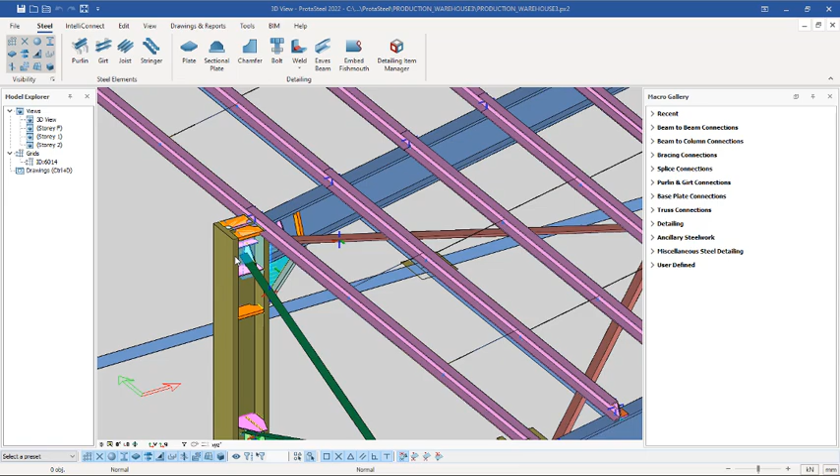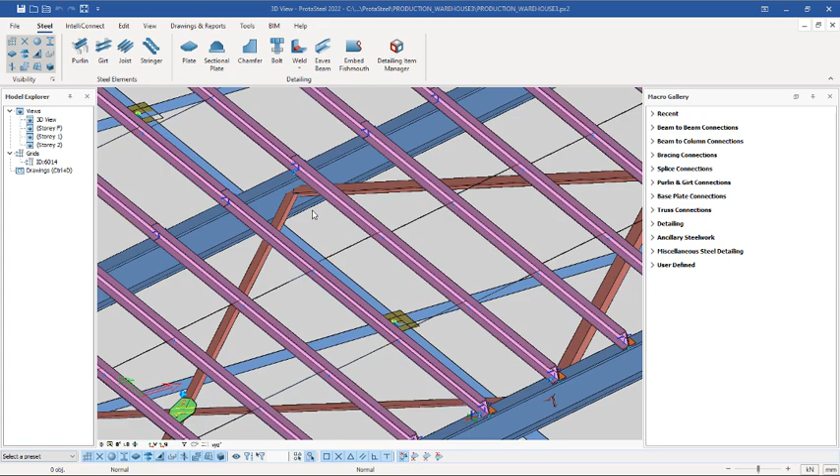To run our connections, for instance these two roof brace angle irons meeting right there, if you want to connect them together with the beam rafter, you go to where we have the brace connections in the macros gallery and expand these brace connections. We want to use a bolted gusset plate. Select the option by left clicking on it, then the first member you select should be the beam, which is the primary member, then select the two angle irons, right click, and you see that the brace has been fixed successfully and is being connected just like this.

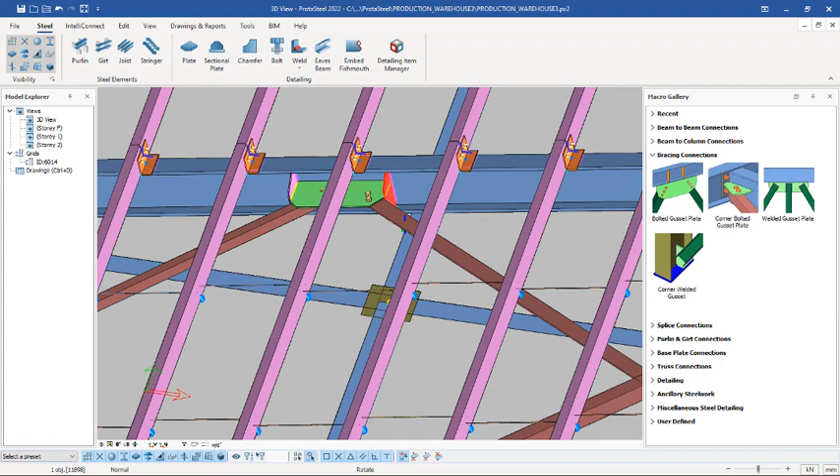If you don't really want this stiffener, you can select it just as it is and delete it.

The same thing is applicable here at this point of intersection of these two braces. You can as well run a connection here. You just click on this bolted gusset plate connection, select the main member and these two other members, right click, and it will be connected just like this.

If you check very well, you will notice that this connection is not modeled at all. So what you do, zoom closely to the macro, which is this one, and double click on the macro. Once you double click on it, it's going to bring up a dialog.

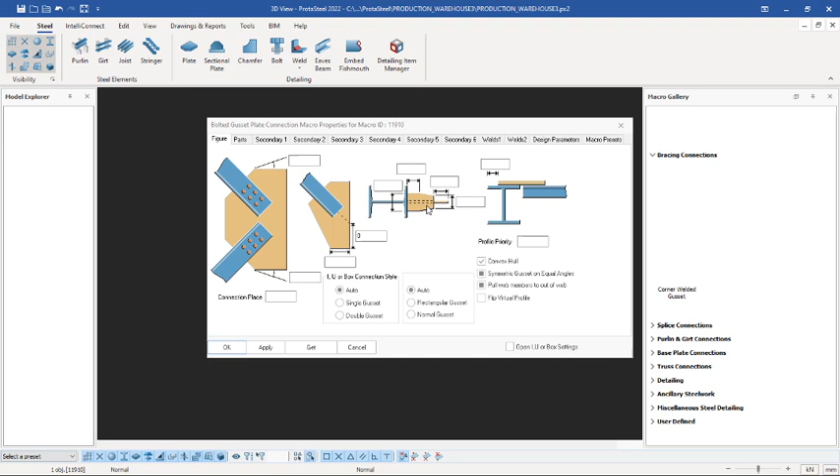In this dialog, what you have to do is in these provisions, key in 100 right there, after which you click on apply, so you can see how it's been shaped now and trimmed successfully. Click on the OK option. Now if you look at it, it is more modeled compared to the previous connection.

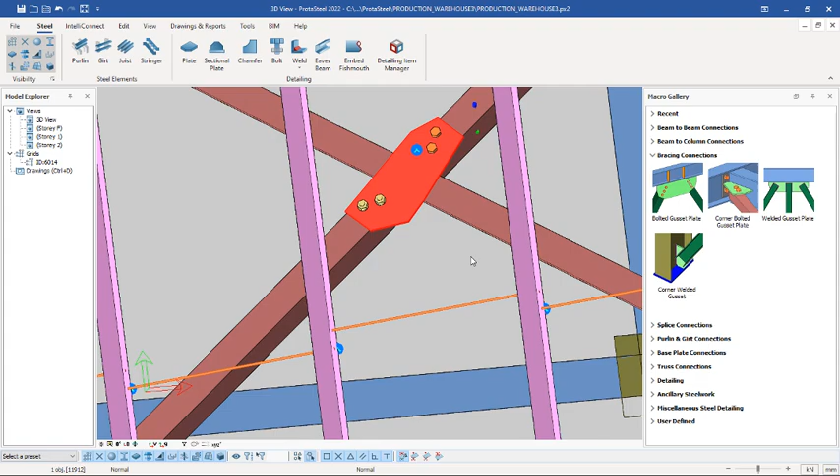This is how you carry out your roof braces. I just wanted to show us that successfully. The next thing we'll be looking at, I want to navigate us through the Model Explorer. Mind you, the same method is applicable to all of these vertical braces.

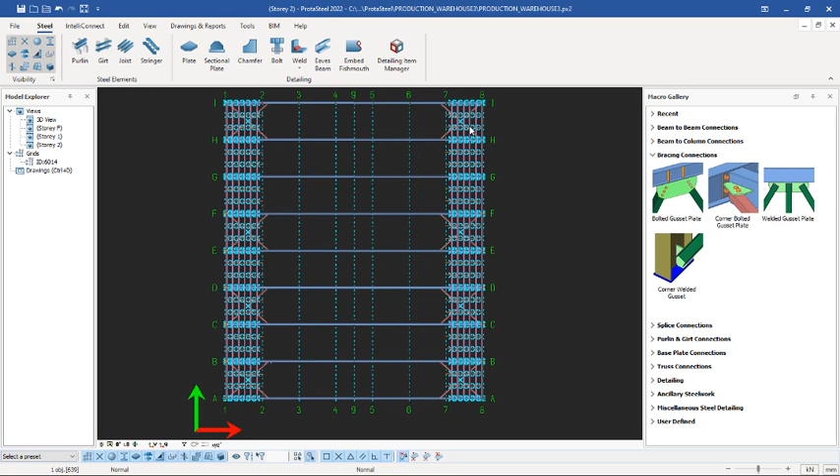If you come over to story 2 right here, you can see it has to do with the roof general arrangement. But if you look very well, you notice that not all the roof members are actually showing because of the reference level of the environment. So we are going to be setting the reference level of this environment so that we can see all of these roof members, so the whole area of the roof will be showing. So how do we do that?

Double click on the blank space to have this view property dialog just like this. After which, where you see up minus, up plus and down minus, you change that value to 0 right there. So we have made it unlimited by changing it to 0. The reference level is now unlimited. Click on apply and OK. So you can now see the whole area of the roof just like this.

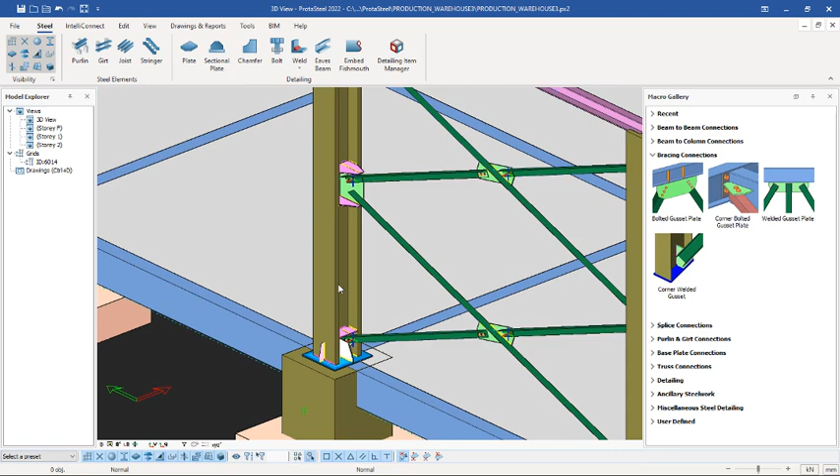So we require this as well in our drawing. Okay, so let's get back to the 3D. All right, at this point we want to actually start to create our drawings. But I believe strongly that we understand the difference between the part drawing and assembly drawing. Part drawing has to do with the member itself, while assembly drawing has to do with other members, like this gusset plate that is being welded to the stanchion.

So once you're producing a kind of assembly drawing, like if I select this, select assembly, you can see all of these members, including the base plate, are being selected successfully. If I right click and select show selected only, you will also see that it is only the assembly drawings that will actually show. Okay, these options.

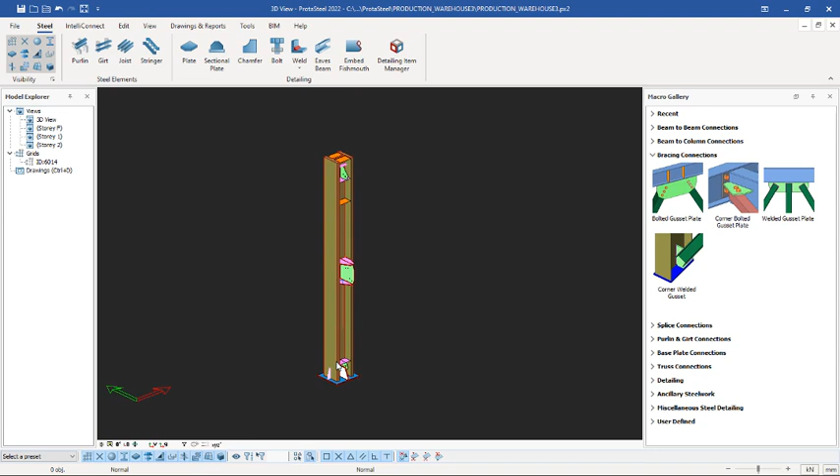Alright, so if you right click, shift this option, so this is the assembly member. Assembly member will consist of the stanchions and other plates that are being welded to it. So if you are producing a drawing, this is what you are going to be having as your assembly members drawing, just like this. So I will right click and then click on show all.

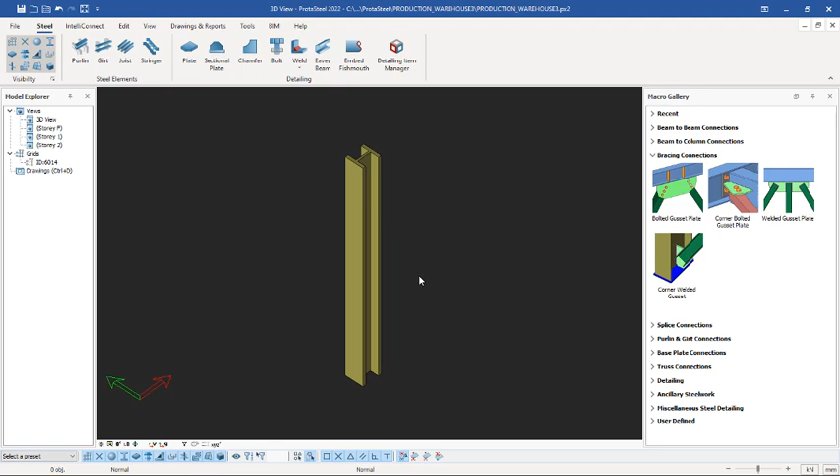So for single part drawing, if I select this, now I right click and then select show only selected, I'll have this. So this is a single part drawing, single part member. All right, so I just want you to understand the difference between these two. When we actually get into the drawing, we will really understand what we are doing.

So at this point now, we want to actually navigate to these drawing options. You see these drawing options, you double click right here, and then this is the drawing model area. If you also click on this drawings manager right there, it will take you to these provisions. Now in these provisions, you have the story F drawings, you have also the story 1 drawings and story 2 drawings. So from here, if you double click on this, it's going to produce that drawing and that story. So click right here now, so you can now see that we have this.

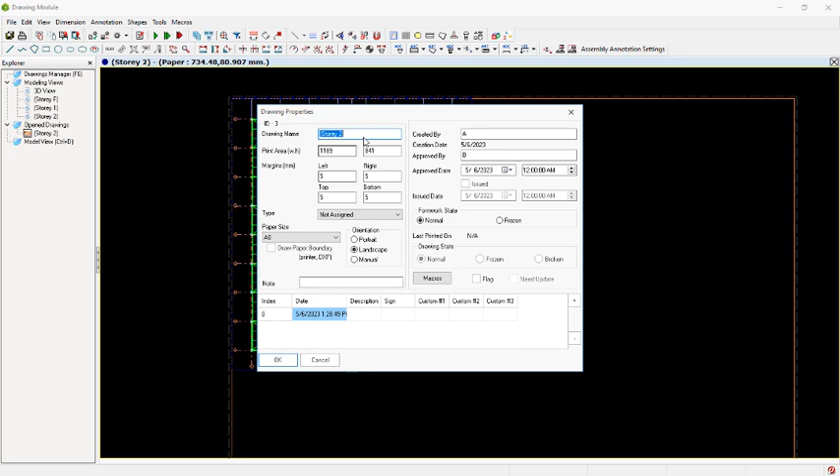So actually we have set to see the whole of this roof area previously, but we did not save the settings. That is why we are still having this. So we can now close this. Click in these provisions, options to close that, and also close the drawing models. Double click here again. Okay, so we have this intact as A0, which is how it's supposed to be. Click on OK and get back to the drawings again.

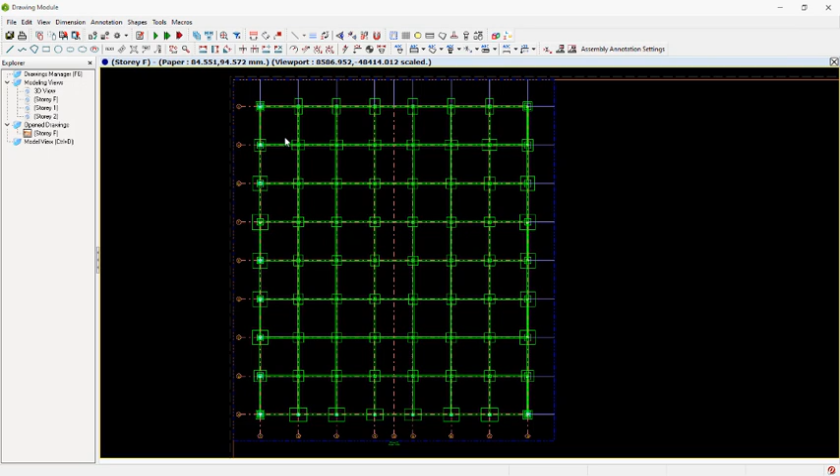Click in these provisions and then enable this again. Let's say we open the story F drawings right there. We have this as the foundations. So now if you want to produce this story 2 drawing, right click on it and then click on create view. This will create a view drawing for us just like this. So we can now have our foundation drawing, as well as the roof area drawing successfully just like this. So by the drawing you see a viewport.

If you hover your cursor on this viewport, you will notice that your cursor will change. Once it changes to this sign, you can adjust this viewport successfully. Once it changes to this sign, you can move this viewport from one place to another just like this. All right, so we proceed.

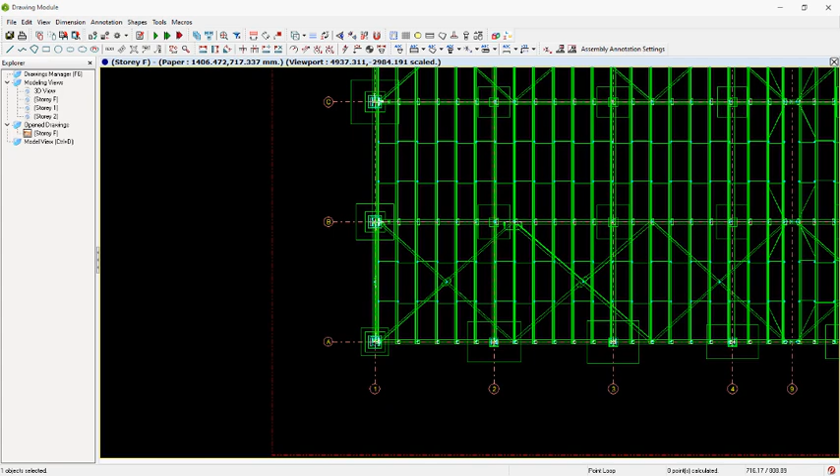If you want to dimension this, as you can see this roof plan now without dimension, you have to use the horizontal dimension or vertical dimension depending on the direction you are going. If you are going horizontally, you pick that one and then you come over to these provisions and you have to get a point snapped. Pick that point, take it to the next point. You will have to zoom closely to get it right, just like this, and then you continue to pick the points to dimension this roof plan successfully.

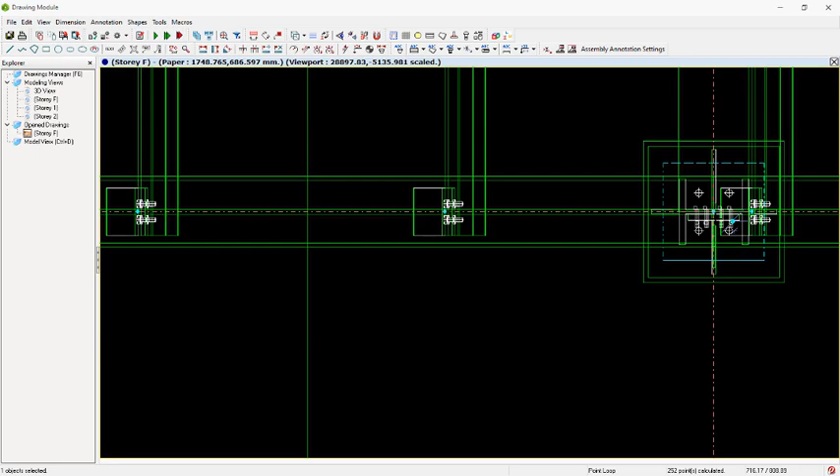After which you have to right click to place the dimension, just like this. So this is what we are to do on this particular interface. We click on the closed right there, options, and then close this drawing module.

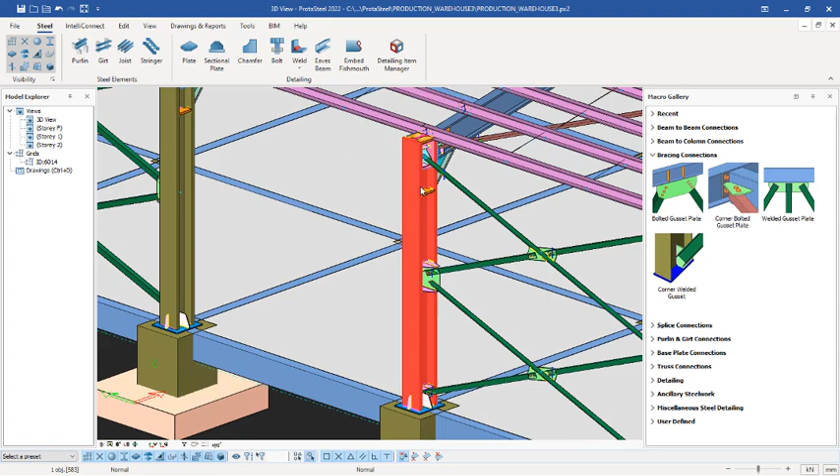So let us produce a drawing for this stanchion, this one. Before you produce a drawing, you have to number all the members in the structure. So you do a window select over the structure just like this, and give it some time to get the whole member selected.

Once the members are selected like this, you come over to drawings and reports and select perform numbering, then first options. Click right there, click on apply and start numbering. This is going to number the structural members successfully. So it's completed. Options, click on apply, then close.

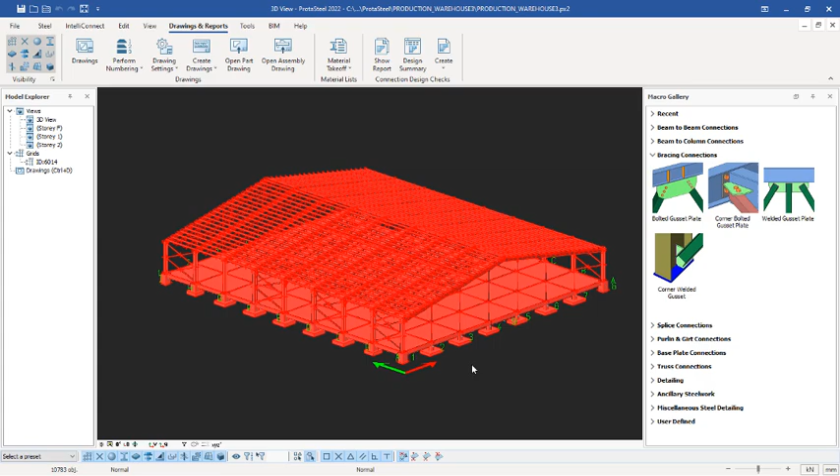At this point, we can now start to create drawings. But before then, let us look at detailing items. For instance, we want to get the detail of this gusset plate, how we connected this angle iron successfully. You get the gusset plate itself selected.

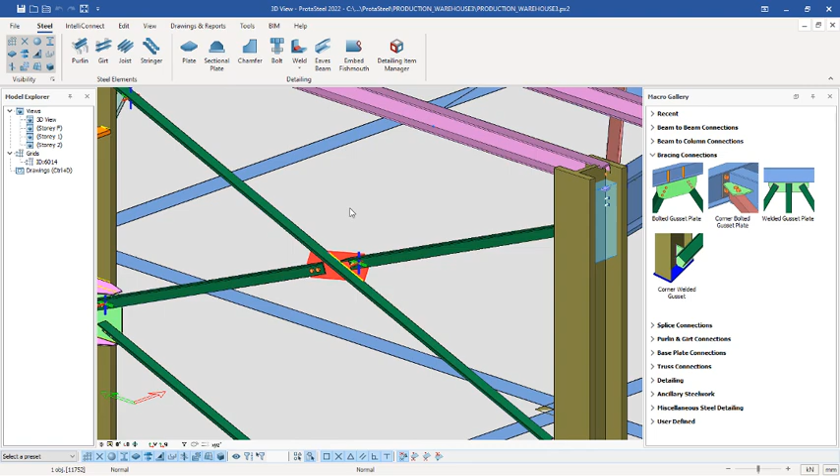Click on the detailing item manager, and then give it a name. Let's call it gusset plate. Click on the add option to add that successfully. The next thing is to select the members that consist of these connections. Click on the select object, and I will select this one and this one. After which, right click to place the section box for the detail items.

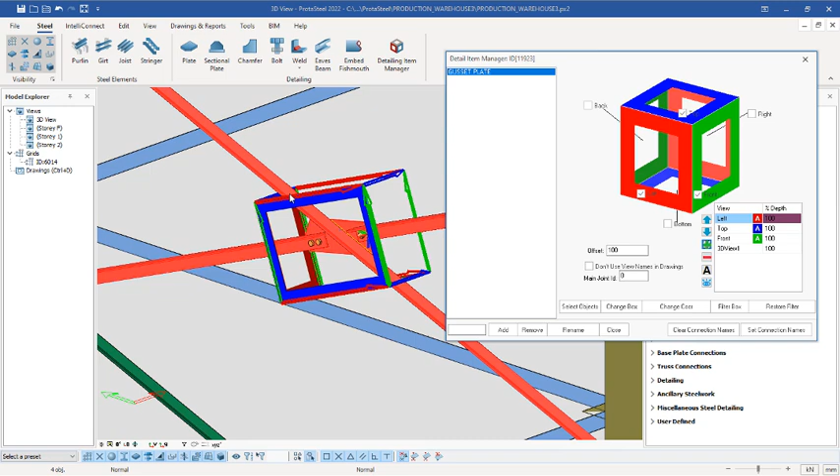So actively we have the top, left and front view. You can activate other views like the back view, right and bottom, it depends. After that, we click on the plus sign to add the 3D view of this, which is very important. Click on close options. I use this to show us how we can make use of these detailing items, and we are supposed to use it in almost all the connection points to show the 3D of the connections.

I will show us how to bring up the drawings of these. The next thing we will look at: let's select this column, right click, we want to generate a drawing for this, and it's going to be an assembly drawing. So go to create drawings, assembly drawings right here. This is going to create for us an assembly drawing, which is successful now.

So how do you see the drawing? Go to drawings manager, so you see this is the drawing. Now we have to select it and rename it as intermediate stanchion, or we can just write columns, columns at middle, just like this. Click on the OK option to have this. So with this name now, you know where the columns are located.

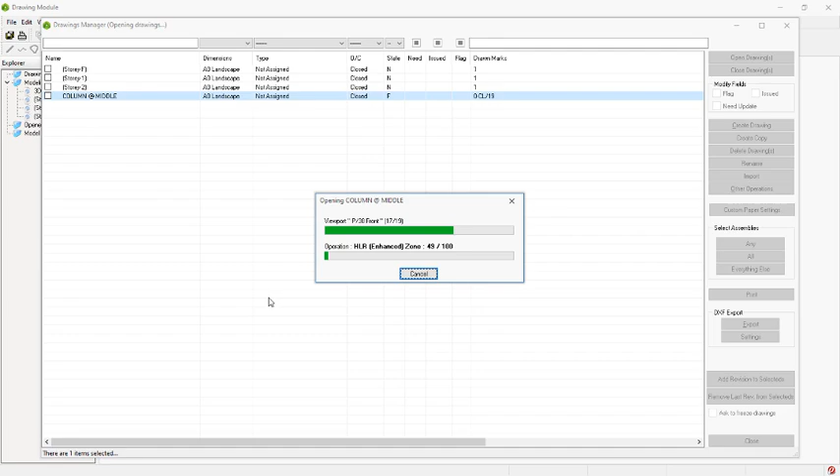Double click on it right there, yes, options to generate the drawings. Altogether 19 items is there. Once you get the drawings generated successfully, just like this, you can now see the drawing of that stanchion successfully. This drawing consists of too many sections, as you can see.

You can actually move and arrange these drawings here. If I do a window select over this, I can have that selected, move my cursor over the boundary, and it changes to this move symbol. I'll click, hold and move this to this point, and also rearrange this, as well as move this out from there.

I'll take my time to make sure I move all of these and arrange them in a way that will work successfully, just like this. Okay, I want to explain these drawings as well as edit this.

Let me first arrange this drawing, just like this. You can see how I'm moving it. You have to select it and then hold it. I can select all of this by doing a window over it, and move my cursor onto the boundary to have this, so I can move all at the same time to a particular location.

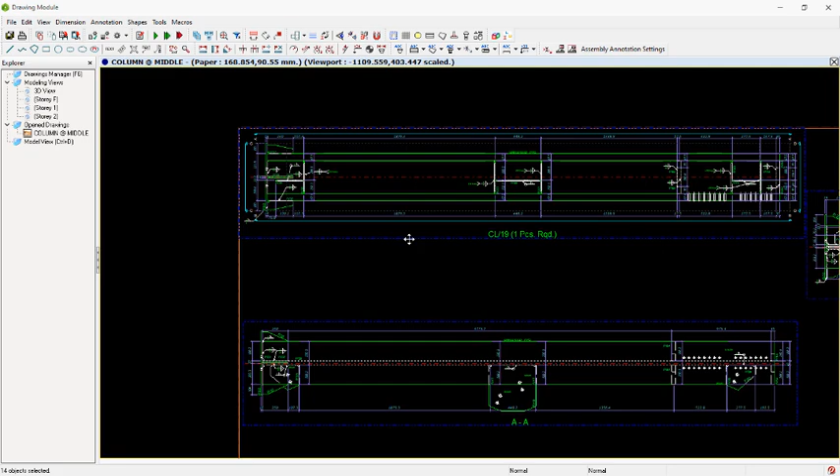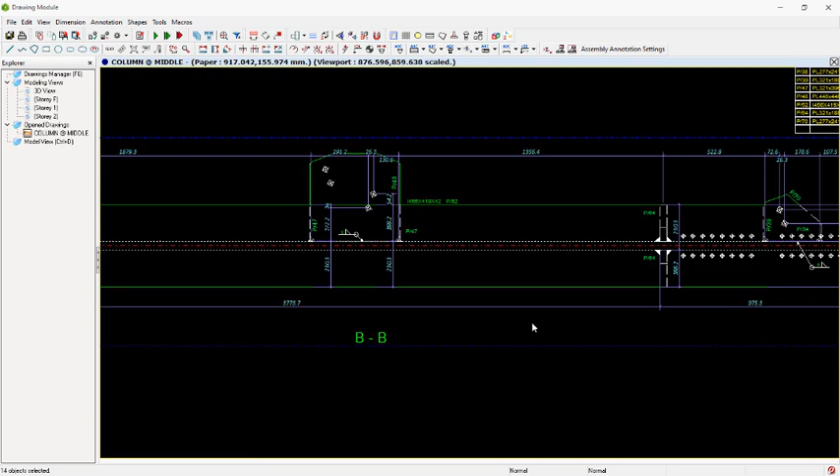Over here I have this main drawing. You can see we are having CL, which is the column, 19, 1 piece required. If you check very well, you notice a lot of sections - we have CC, we have A, and we have B sections. These two sections are the ones you are seeing here, which also produce the legibility of most of the plates, as it is being connected to the stanchion successfully.

If you check very well, you have this sign - this is called the weld length. You have too many of them right there. So what I normally do is delete some of these and use one for all. To delete it, you can easily use delete on the keyboard and then yes to confirm. Because this one is the longest weld length, you leave the longest one and delete all this short weld length, just like this.

So we are now having 21 millimeters. We go by this. The next thing we have to look at, let's move this one and reposition it as well.

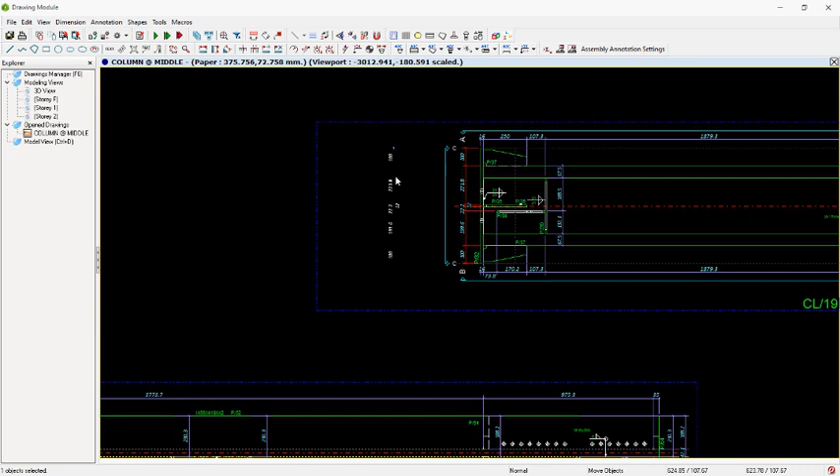Now let us expand this boundary like this. We want to work on the dimensions - click on this and move this dimension outward. The reason is because we really don't want it to clash with the sections. So hover your cursor on the boundary until it changes to this sign, move it upward and select this dimension, take it upward, just like this.

So we will take this just like this. We also need to expand this. You just have to hover your cursor on this to change to this sign, then drag to expand that. Same thing applicable in these directions - drag to expand because we need to push this dimension outward, just like this.

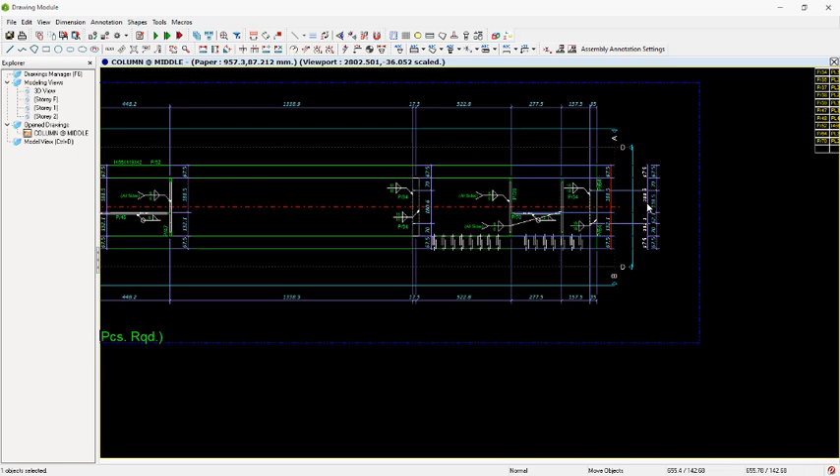Having done this, the next thing we'll be looking at is to edit this text. So select the boundary, double click on the boundary, have this. With this now, we can come to the general tab first and give it a name as column.

This column has a piece mark - I'll also explain to us, piece mark 52, which is P/52. So we just have to key in there and type column P/52 right there.

Once you get this done, come over to labeling. We want to place that text outside of the boundary and not inside, so you click on these provisions to locate it there, and then come to the text settings. Click here - for the font, we may be using 5 in this case, 5 millimeters. We need the scale, so we activate the scale, and the scale text is going to be 4 millimeters. Click on OK, and by the time you apply, you can see the text come off over here.

So the number required now, what we have here is just 1 piece, but it's not 1 piece - you have to calculate the total numbers of the columns at the middle and then key it in here, and that's all.

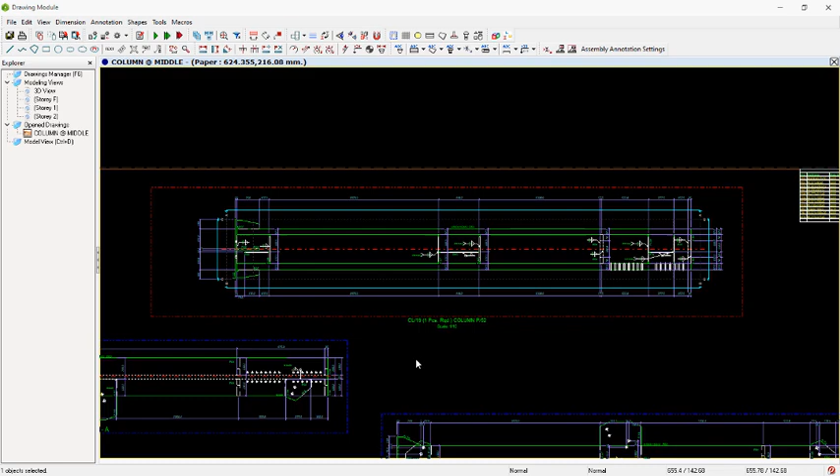The same editing we did here, we are supposed to do in these provisions, in these sections as well. For this one, you can double click on that, come over here, and set it outside. This text height we will make 5 millimeters, then activate the scale, reduce the text height of the scale also to 4 millimeters right there. Click OK and apply it.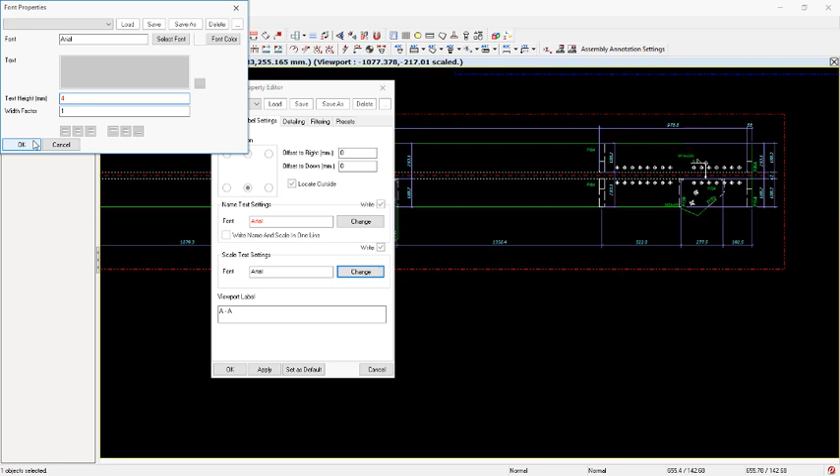So you have this, but we need to add a kind of section name to it. We may come over here and add that through these provisions - you can call it view AA, then just add details right there. View AA details, apply it right there. Okay, so we have something of this kind.

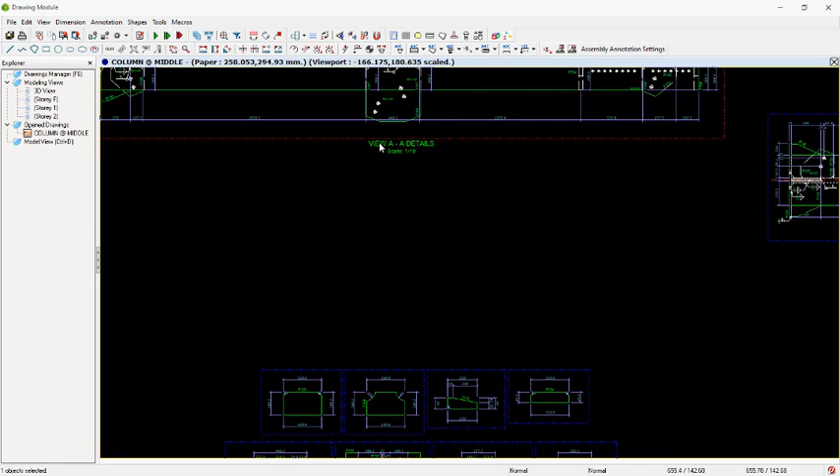The same thing is applicable to these ones. For this is the section CC. You only have to take time to do this naming and adjusting your dimensions, and then you are good to go. After which we have to close this, and then click on the yes option to save it successfully.

You will come over to these provisions. We are only seeing the column at middle and the stories, which is the drawing we have for now. So I want to close this. The same way we produce a drawing here, we also used to produce the rafter, the beam rafter drawings.

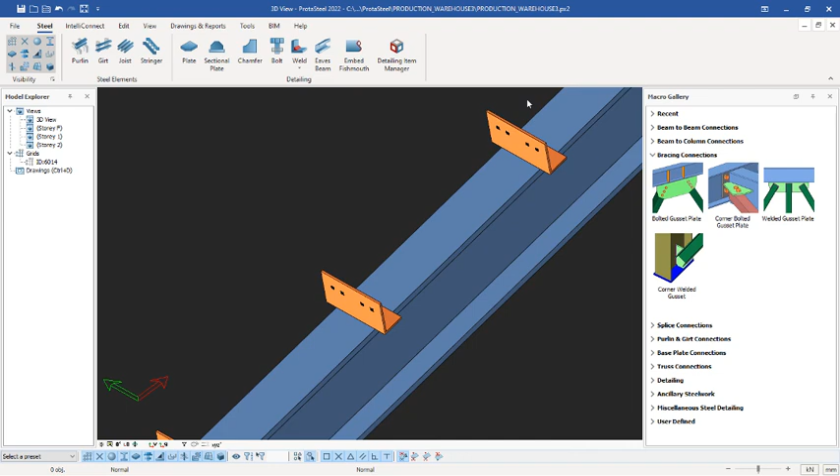So if we produce drawing for this is all of what we will be having. Those plates will be named and given a part mark which we will use to identify which is the plate successfully. Right click and then click on the show all right there.

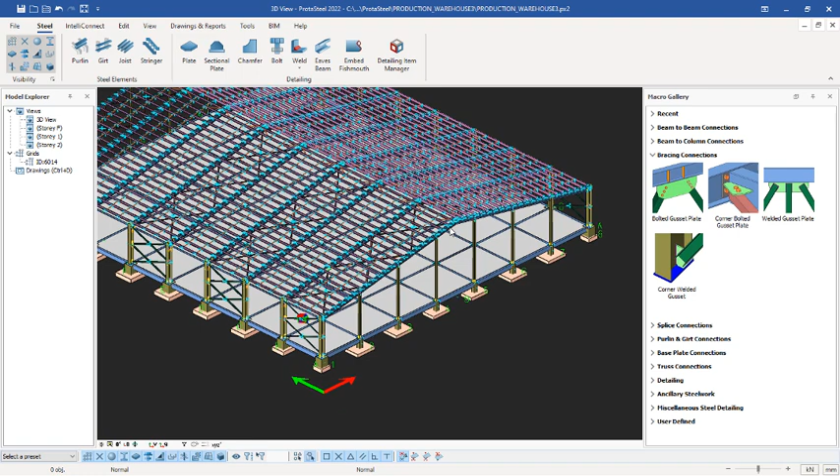So the next thing we will be looking at, we want to cut a section across this grid line A. So we can do that while in the 3D, or we can get to the foundation story. Mind you, we cut it along AA.

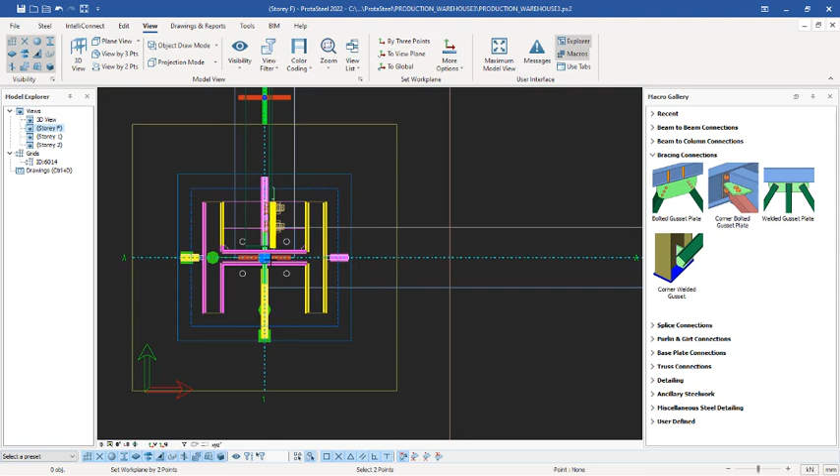So what you need to do, navigate to the view tab right there, and then you come over to where you have view by 2 points. Click right there, zoom closely to this, and then you pick the first point. You come over to this other end, zoom closely as well, and then you have to pick this point. So once you pick that, this will create sections just like this.

So for these sections now we have to carry out the dimensioning, but you can't do that here. So now we have the sections named as a new view over here, you can see it here. Double click in the black space, so you have a view property dialog. You can give it a name as section AA. Click apply it right there, and okay, so you have a section just like this.

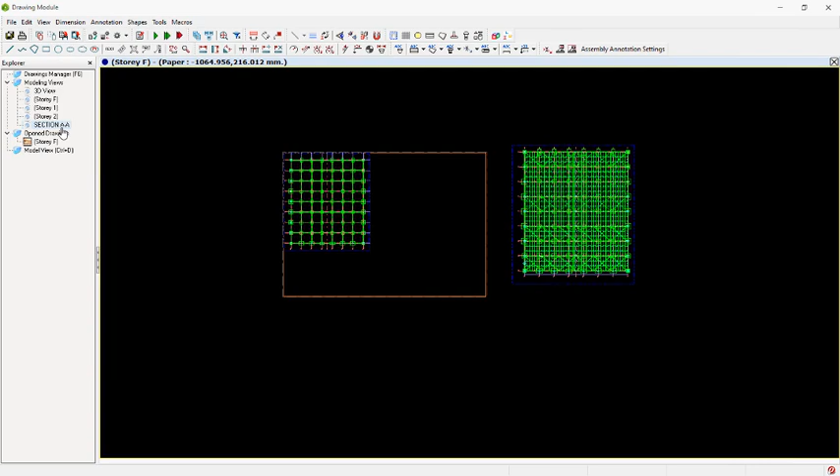So if you want to have the drawing of these sections, you can double click and navigate to the drawings manager. You can choose to open the story F drawing by double clicking on it. So once it's open just like this, you can select this section now, right click and create view just like this. So you have the sections that we created.

So having this section here, you can do so many things now to the sections, like dimensioning and giving it a name, or give it a name like section AA. You can just double click on that.

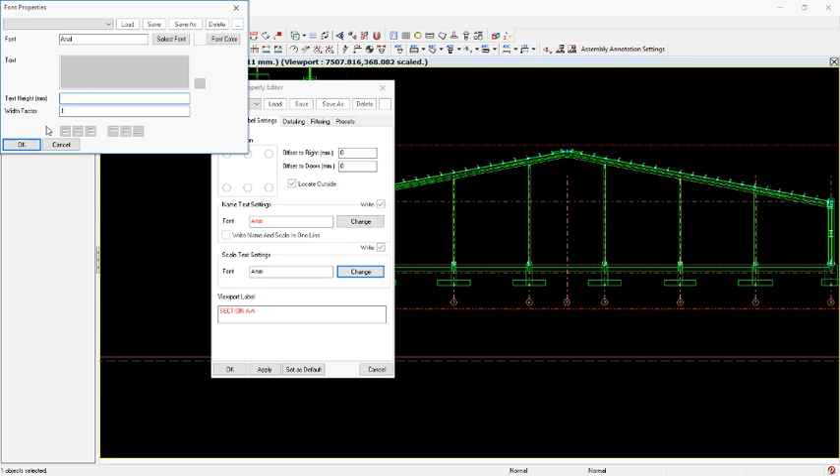You see section AA there, copy this right there, take it to this place. You can place it here as well, and then over here is being activated. Place it outside, activate this, and then you work on the text height right there. We can take it to 6 and then activate the scale of these drawings. You can also change the text height of the scale to be 5 millimeters. Click on OK options and apply it right there, and then you have this.

Now for the dimensioning, let's say one dimension from one roof purlins connections to another. So we use this one, this is the general dimensions. Click that, so we navigate to this point, pick this point as the first point. This is the first purlins right there, this is the second purlins right there.

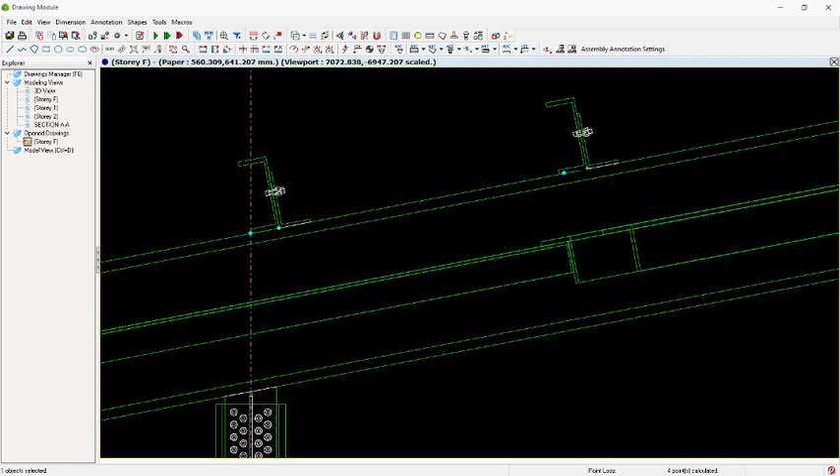Third purlins, fourth purlins. So we just continue to pick the purlins point, so we get the accurate and exact dimension. If you notice, when we actually place this purlin, it was at 1 meter apart. So this 1 meter is what we are having right there.

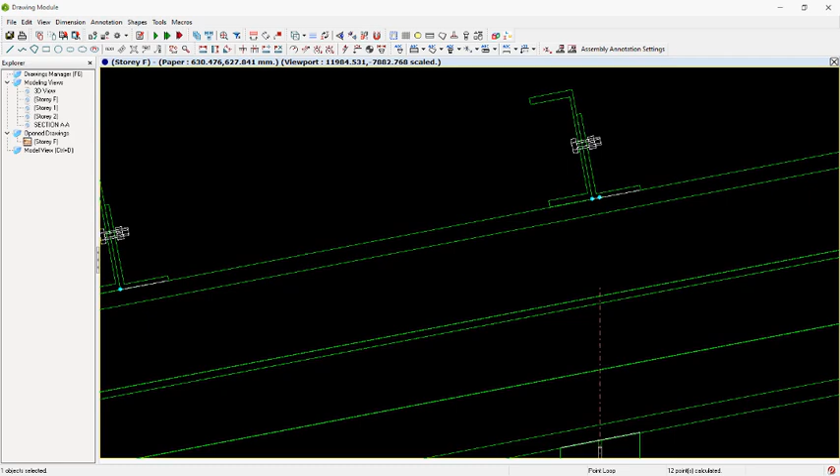So if you move your hand upward just like this, right click, you see it placed successfully. So we skip this point, that's why having 2 meters right there. So all of this is just to show you how and what you are supposed to do successfully.

Okay, so having done this, now we have the drawings and we have the roof right here. I will be taking us to how we can take these drawings to AutoCAD and be able to adjust these drawings using a Prota Steel detailing template successfully.

Before then, let's get rid of that by interrupting it. Get back to the drawing manager and open this columns drawings right there. I will be explaining one or two things for us.

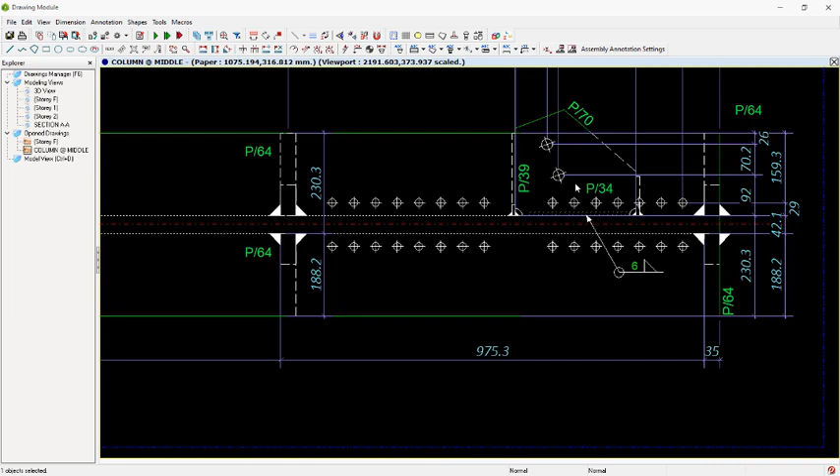If you zoom closely to these drawings, you will notice you're having P/39, P/34, and the rest, some value as you are seeing here. These are called part numbers, and it is this part number that you can use to actually identify which of the plate is here.

Once you see this plate, you see every plate carries a part number. With this part number, you can be able to look at the plate and its positions, where it's been welded to the stanchion successfully.

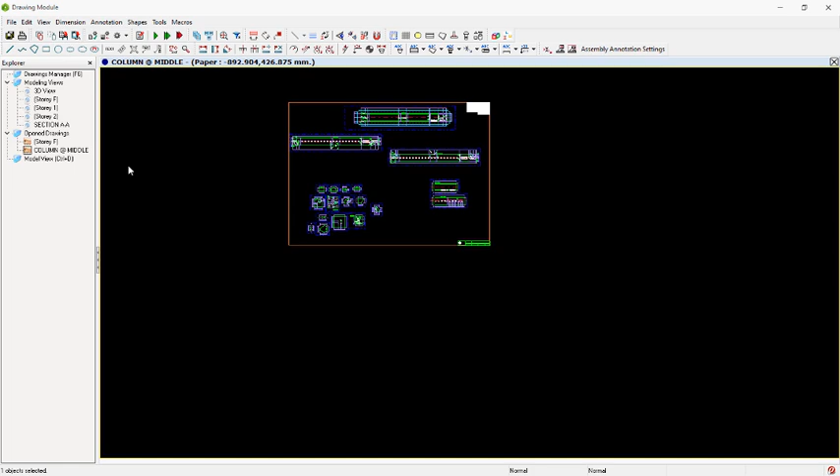Again, for the detailed drawings, you can bring it in here, or you can bring it in at Storey F, wherever you have drawings open like this. But first you have to activate the 3D view, so you select and create 3D view. If you do not create 3D view just like this, you won't be able to get your details that you created.

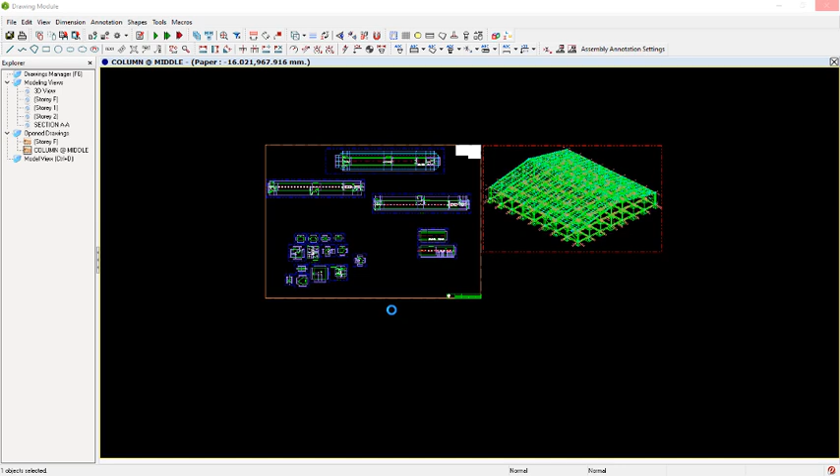Click on the detail items, and it is going to create that detail that we just created for us. So it's processing it. So the detail is created successfully.

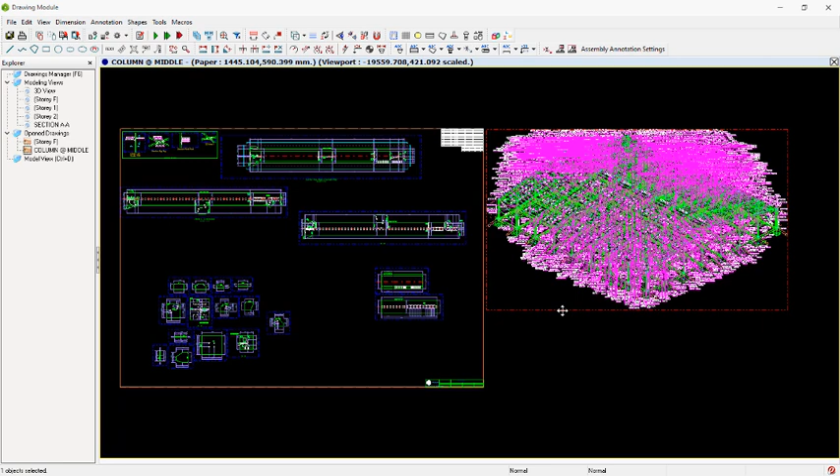That is why you see this 3D is very busy the way it is, because all of the members is also being generated, all the sections. We wouldn't like it to be like this, so you have to select this and then select delete, click on delete on the keyboard, yes options, to get rid of that. But if you want to still bring it up, this can bring it just like this.

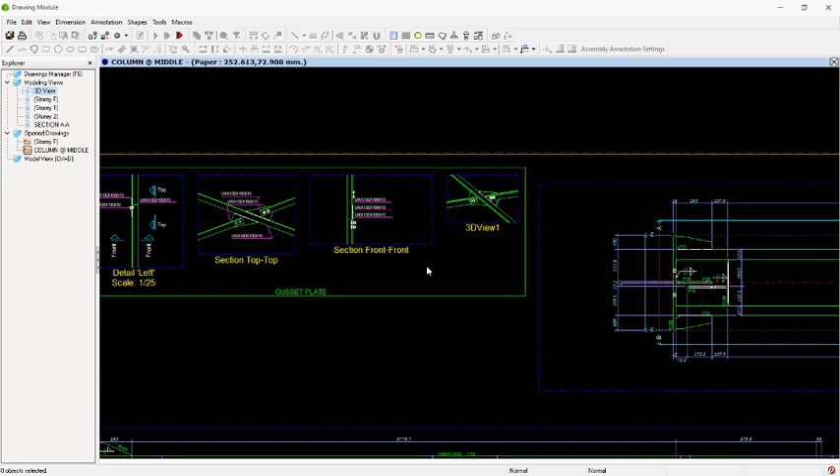Here is the detail that we actually created, so this is the 3D of that pull lines detail we created. With this now you can be able to call it out, and then you give it a name and the number that it is in the structure. If there are other like ten of these in the structure, you put it under it to show the number that is actually in the structure.

So we get back by closing this. The same thing we have here on the roof, we have it very busy like this, so when you want something of this kind, you have to delete this right there, use delete on the keyboard.

Yes, options, and again you can still bring that up just like this, which means we need to dimension this again. Over here, cursor to have a move symbols to move that, and then we go to the horizontal dimension.

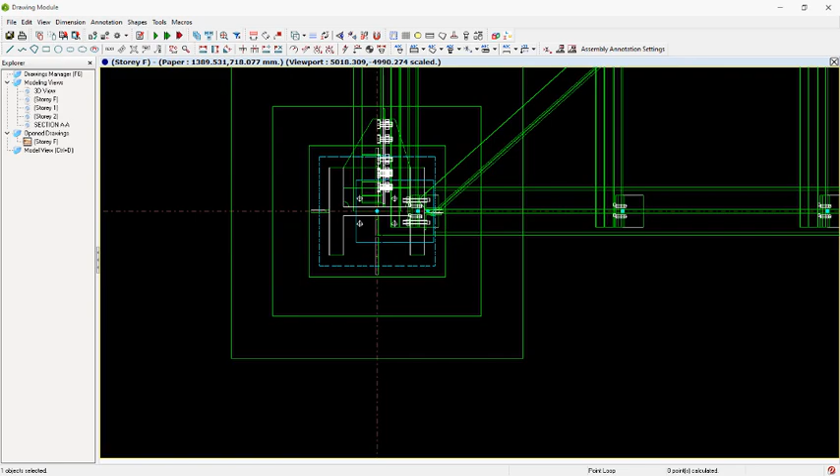After which we look at how we can export these few drawings we created and how to set the scale, how to set the scale to match the AutoCAD environment scale.

So we pick these dimensions from that point, the point of the grid lines to another, just like this.

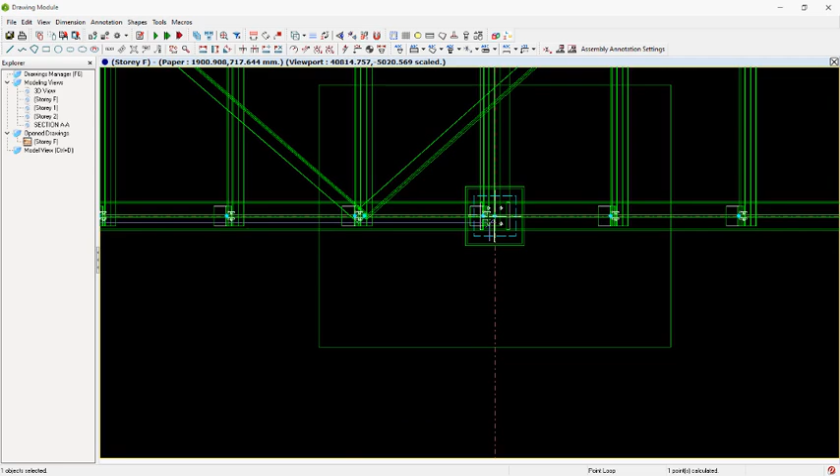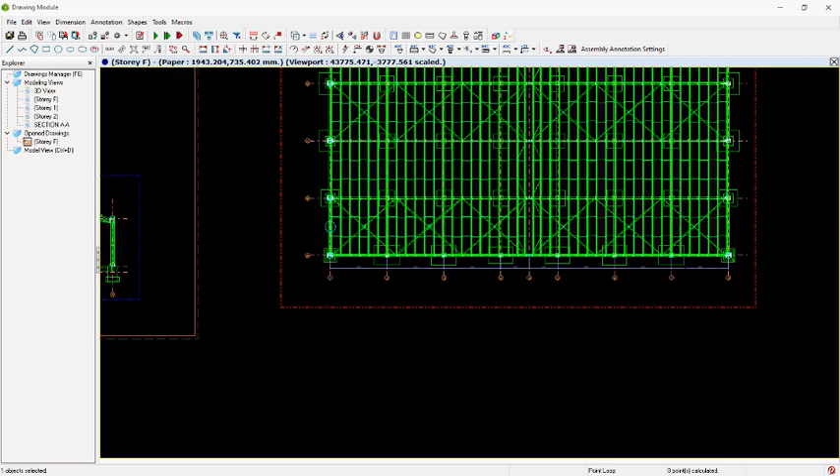Left click to place it. You can also dimension the second layers of dimension, which is from the end to end, just like this. So you left click to place it. You have about 42 meters width of the structure. Click on the closed options, yes options, to save change to that.

After which you can get over to this. We'll be sending Storey F, we'll also be sending the columns at middle to AutoCAD. So we'll get those two items selected. Click on the export, DXF export options, click there.

So it is actually navigating us to the directory, so we're saving it to the desktop. Select desktop, click on the OK options. So one of two items are there.

Exporting is in progress, so we have to wait for some minutes. So the export is done, click on the done options right there. So you have to close this window, close this window as well.

We minimize this. On this desktop we'll have this column at middle, we also have the Storey F. We double click on that, so it's going to open those drawings in AutoCAD.

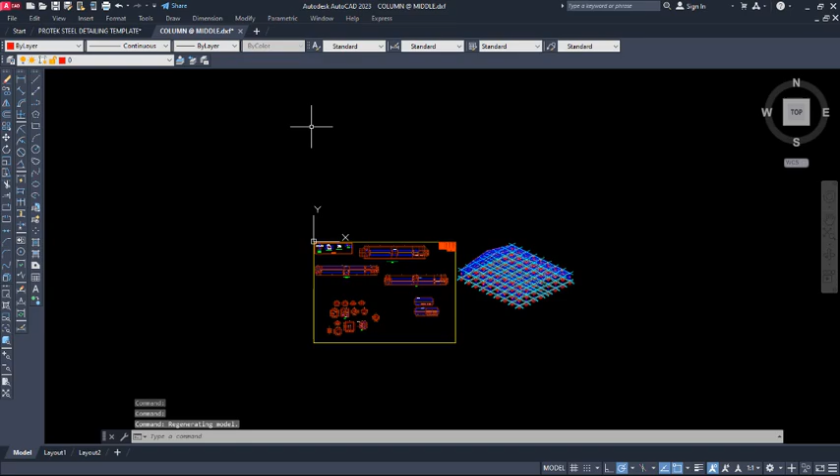These are the drawings we exported. Having the drawing in AutoCAD, this is how the drawing normally looks. Let's bring in these other drawings, which is the Storey F. Double click right there.

So let's expand this and see the drawings that you have. Okay, I haven't gotten these drawings yet. Here we need to get this Protek Steel detailing template.

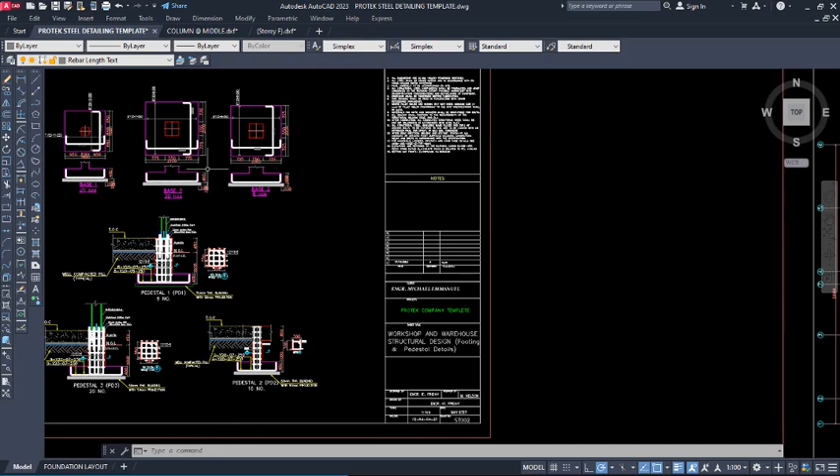This is the steel drawings - the foundations, pedestals, and footings were detailed just like this in this template. With this template you wouldn't really need to do most of this; you just have to change the dimensions and make use of it. This is the floor slabs, the split beam arrangement, and the beam sections, everything, as well as the steel drawings and how they are arranged in this Protek steel detailing template.

I have another set of steel drawings right here. You can reference these drawings to arrange your own drawings.

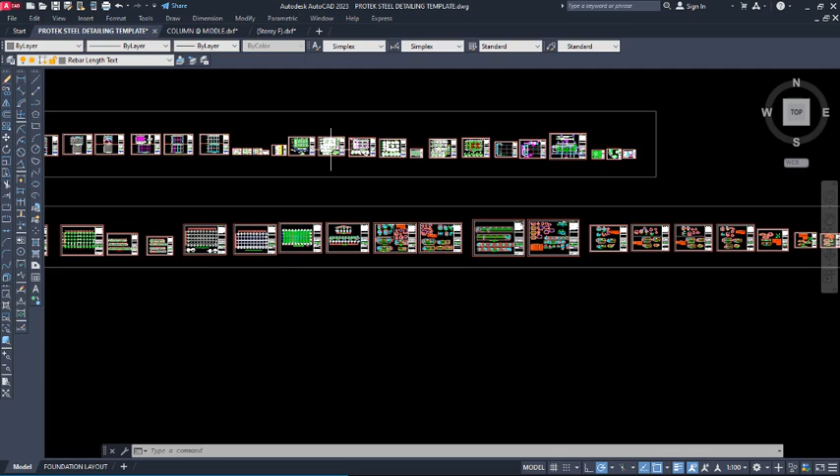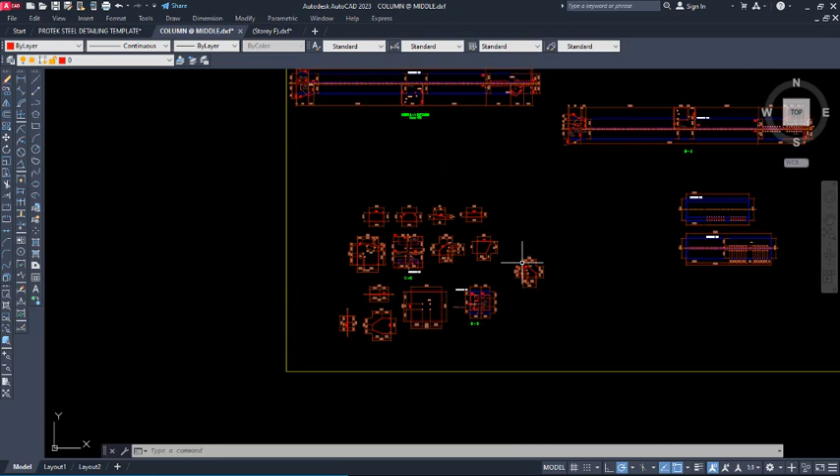Again, this template will actually edit this work for you. This work you have here, this template will edit because it has been programmed to actually edit the Prota Steel drawings. So for instance, if I select - let me zoom closely and select some part of this drawing right there.

Like this one, I selected these ones. You can see the way this drawing looks. I will right click and copy these drawings to clipboard, after which I come over to the Protek Steel detailing template right there. So if I paste this drawing here, I want to show you the difference between the two drawings - you see how tiny this drawing is?

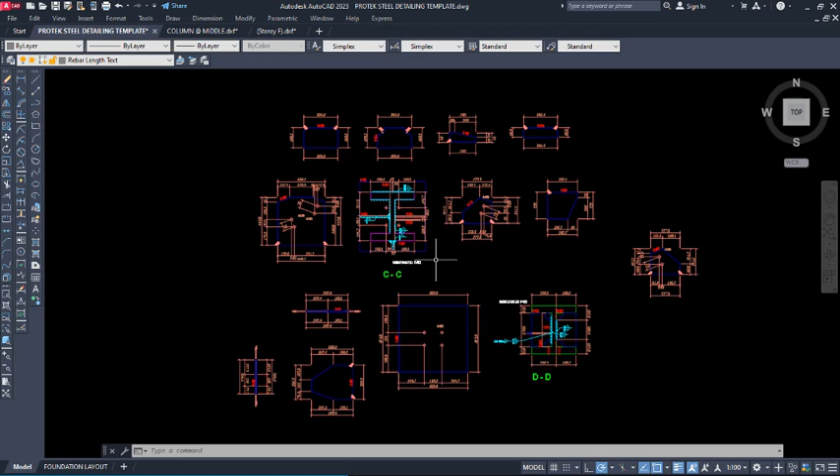This is one of the tasks we are going to be doing - subsequently changing the scale to match this scale successfully. But before then, zoom closely to these drawings - you can see the changes that have been made.

Now let's open this one. You see the way this one is. Go to the PROTEK Steel detailing template - you see the way this one is. A lot has been done to this drawing successfully. I'm just trying to show you the difference - look at the way it is and this one. You can now see. The same thing is applicable to all of these drawings here.

For this beam now, if you take it there, it's going to change and edit it, both the text automatically. So just get this template - the links to get this template are in the description of this video.

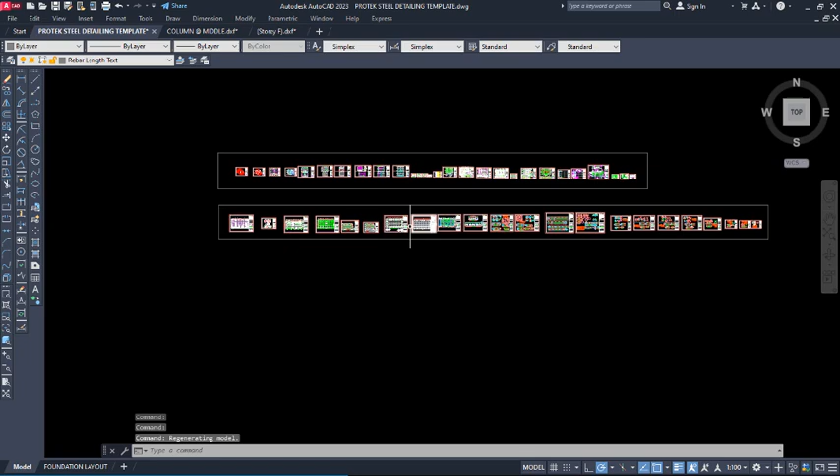Another thing we are going to look at is how we can adjust the dimensions, most especially the dimensions of this layout. So if you check here, we have 6 meters. We also have 3 meters here. Now if you take this drawing out to AutoCAD, let's for instance highlight all of this.

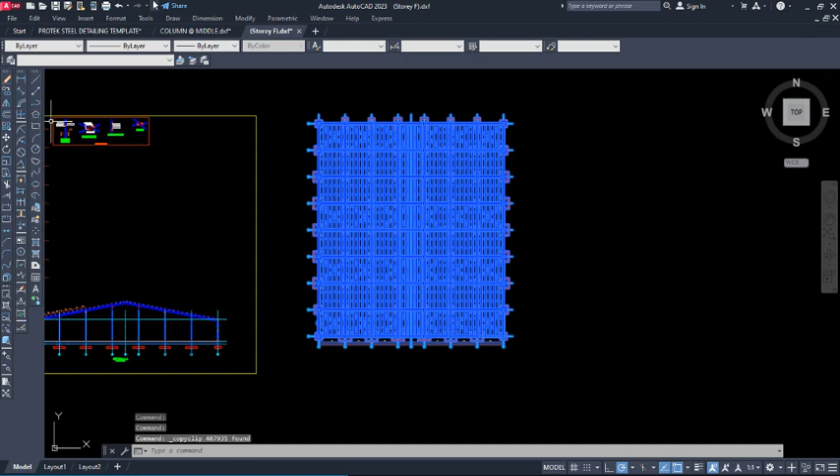Let me show you something. You have to right click, go to clipboard, and copy that successfully. Having copied that to clipboard, we navigate to the PROTEK Steel detailing template right there. Open it, and we paste these drawings right here, just like this.

You will notice that this drawing we are going to paste now is going to be very tiny, just like this. Let me paste and zoom it a little bit for visibility so we can actually see how this drawing looks. So this is 6 meters. If I use the AutoCAD tool to dimension this now, you see what it's going to give me - from this point to this point, see what I'm having, 86.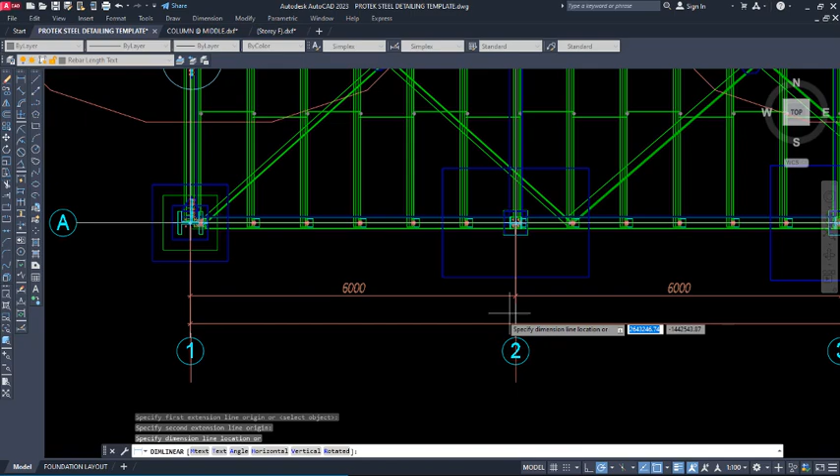You can see - so it now looks as though you cannot be able to dimension the Prota Steel drawings. But I want to show you some settings we are going to do and scaling that will help us dimension this and get this 6,000 millimeters right there.

So if you select all of these drawings, make sure it is selected just like this, after which just type SC on the keyboard, or use the tool tab right here for scale. This one is the same thing, so enter on the keyboard just like this.

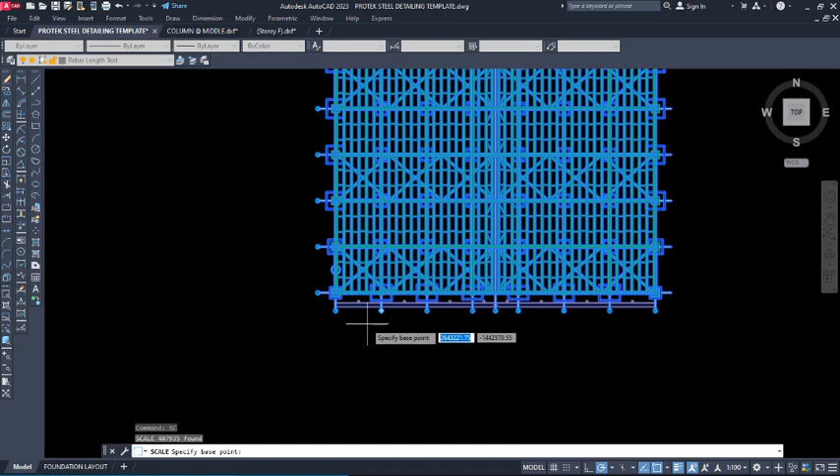So now it says specify base point. I will pick here to be my base point. Once you pick that, you see the drawing is already adjusting. So we will be referring to reference - you can come down, you see a reference here. Pick the reference or type R on the keyboard.

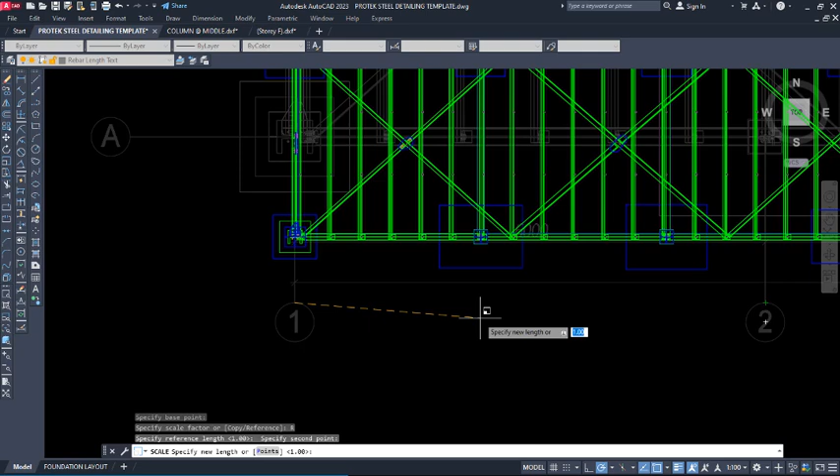Enter for reference, and once you enter that, you pick 2 points - I'll pick these 2 points, which is the first point, and this is the second point. After picking these 2 points, I'll have to decide the length I want those 2 points to be - I want it to be 6,000, just like this. I'll click enter on the keyboard, and this drawing is going to be scaled.

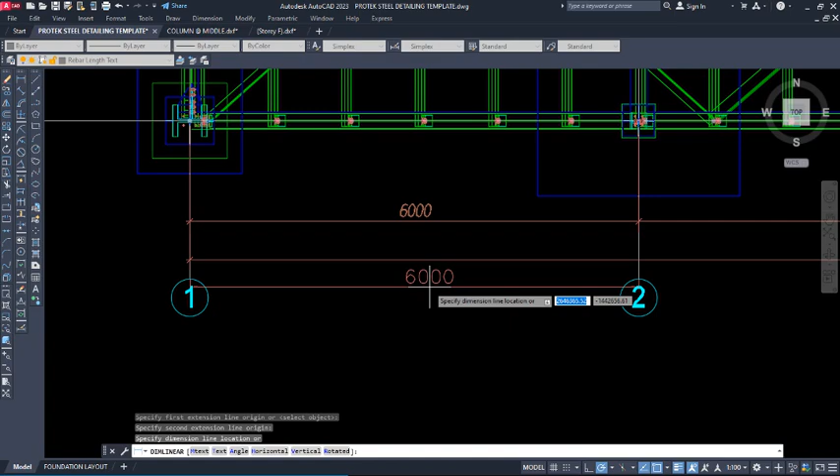It is going to be scaled to that 2000, 6000 that I've set. Okay, so you can see how much bigger this drawing is now. Let's try to do the dimension again. So you pick the linear dimension, pick the first point, come here and pick the second point. So you notice we have 6000 right there. So this has been scaled successfully. So at this point, you can use your AutoCAD to do your dimensioning and editing on this drawing successfully.

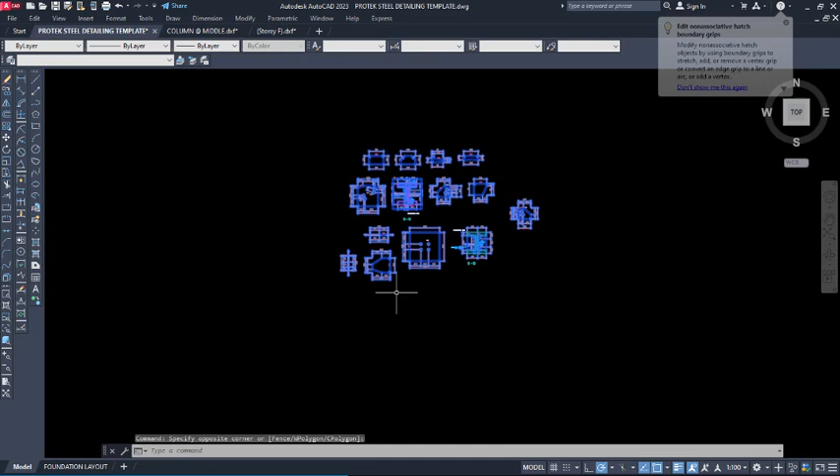Okay, so over to this one that we have here. All these dimensions are very correct, so we don't really need to dimension this again. So you just have to scale it. Type in SC after getting all selected, enter, and then pick a point right there and type 100, just like this, to have it scaled just like this. So with this, if you bring these two drawings close to this, you will notice that it's almost the same scale as the ones. Okay, just like this.

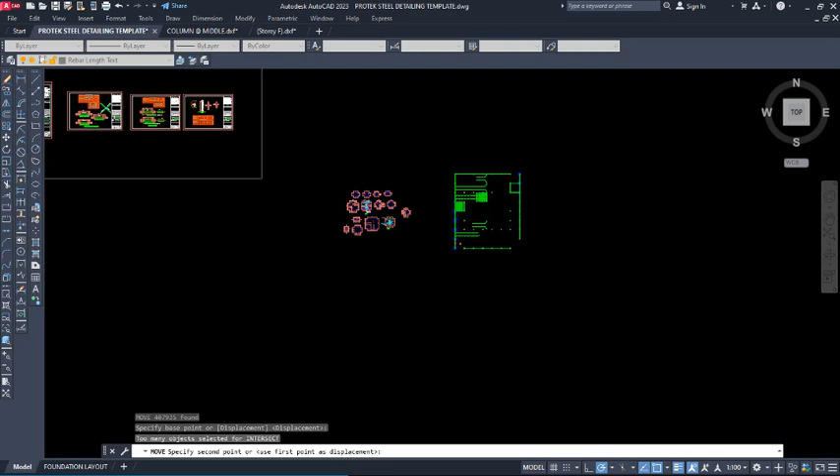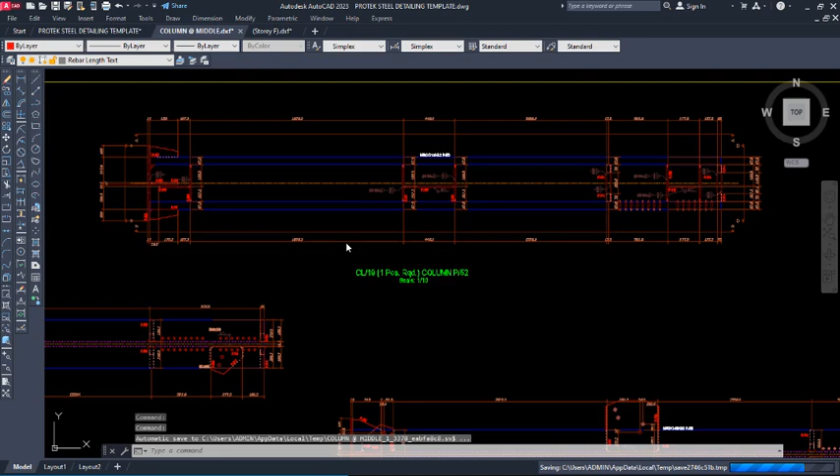So this is how you carry out your scaling of your drawings to match the AutoCAD environment. So this template will help you to minimize the stress of editing your steel drawings successfully. So here is what we have. If I should get back to the columns right there, let's say I copy this for instance. I'll right click and then I'll go to clipboard right there to copy that. I come over to the templates, I right click and then I also paste it here. So you can see how this drawing looks compared to this one. Alright, you can see it right there. So this template is going to be very useful for you.

Okay, so in terms of arranging your drawings, you can check the order of arrangement. In terms of editing your drawing, it makes a lot of changes to your drawings successfully. Okay, so by the time you've created the drawings of all the parts of the structure successfully, what you just need to do is take them to this template to make all the necessary changes and start to do the necessary editing and the scaling just as I've done, in order for you to put your drawings in a title block just like this. Okay, so for the sections that we cut, I want to be showing us something similar to that and how we can cut other sections. So now we have something like this.

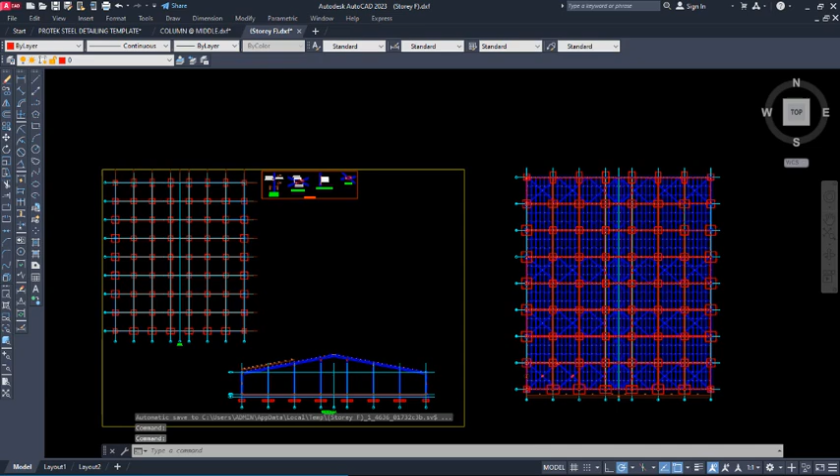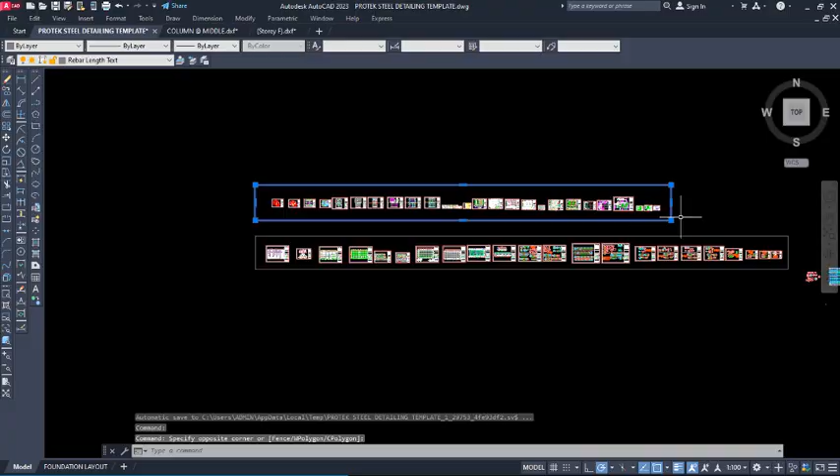Okay, for instance, if you copy this to clipboard, get back to the Protek Steel detailing template right there, and then if I should zoom closely to this first drawing, like this, and I paste it here, see how small it is, something like this. So this is a kind of a plate type. Okay, so if I should scale it up to 100, you can see now it's bigger. So this is just the same thing as what you are seeing here. So having brought it up like this, you now have to label it. Okay, you label it, give it a name.

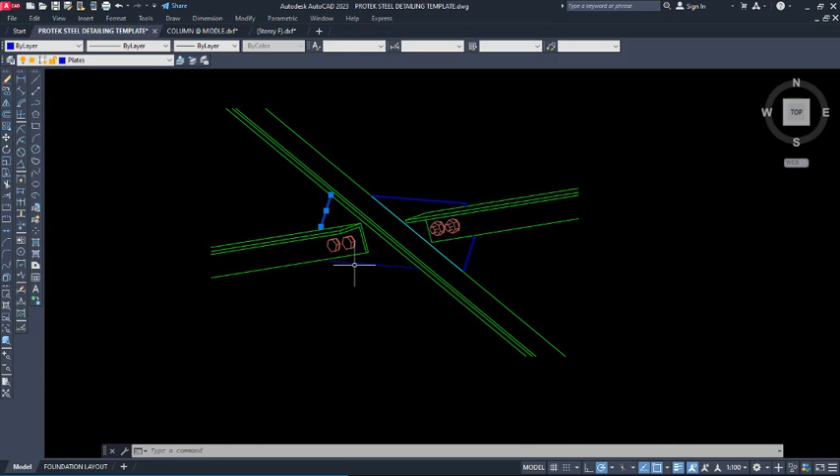Okay, so coming over to this, you just have to carry out all the necessary detailed drawings, right? And then you arrange it accordingly, just the way it is in this template.